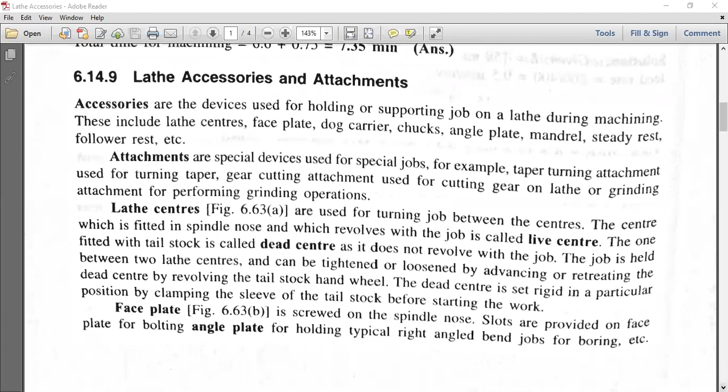The faceplate is screwed on the spindle nose at the headstock side. It is a circular disc with holes on it. It consists of a threaded section in which the nose of the lathe spindle is fixed. So why use a faceplate? Because it is usually used for workpieces that cannot be held properly by centers and chucks. If the workpiece cannot be held by the dead center, the 3-jaw chuck or the 4-jaw chuck, we use the faceplate. We will see the diagram also.

So slots are provided on the faceplate. Slots means circular holes, or slots are provided on this particular faceplate. So you have to bolt that for bolting the angle plate, if we want to bolt the angle plate for holding typical right angle bend jobs. If you want right angle bend jobs, you have to use the faceplate.

And already I told you, the faceplate is used for workpieces that cannot be held properly by the centers and chucks. So that is one of the things, for holding right angle bend jobs for boring operation. So all this is one of the aspects of this faceplate. Diagrams we'll try to see whenever they come in between. So the job itself is bolted on the faceplate.

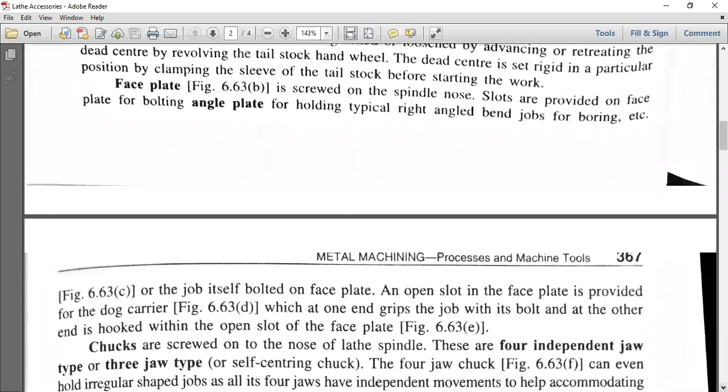You can easily bolt because we have the circular holes or discs where we have the threaded portions, and whatever job we want to machine, we fix on the faceplate, and we use that as a lathe accessory for the subsequent machining of the job.

So we have an open slot in the faceplate. The open slot we have already shown in one of the diagrams yesterday. Why is the open slot there in the faceplate? It is provided for the dog carrier. We'll see in diagram 6.63, because it grips the job with its bolt, and the other end with the open slot of the faceplate. So that is one of the important aspects of the faceplate.

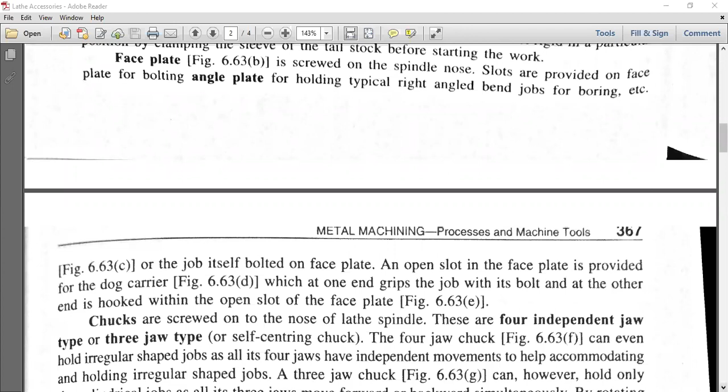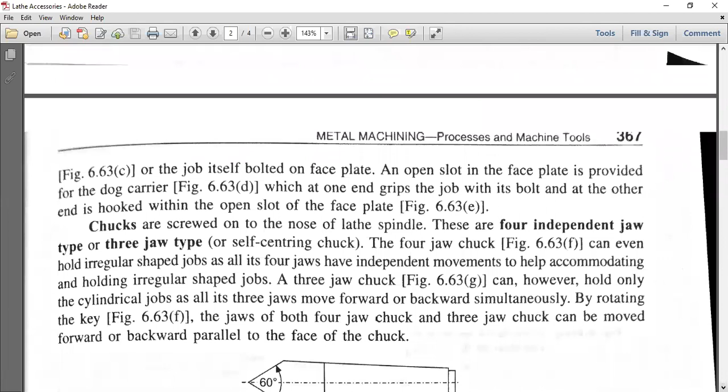So we have the chucks also. Chucks are screwed on to the nose of the lathe spindle. So we first will try to finish up the faceplate diagram. So we have an ordinary center, the different types of centers. I already told you, we have to discuss the dead center, ordinary center with an included angle of 60 degrees.

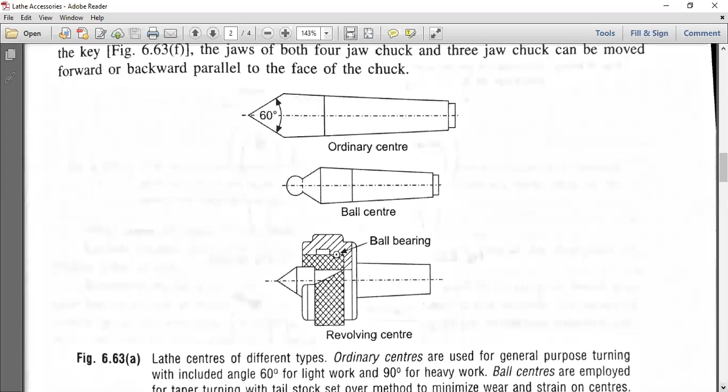And this is a ball center. And this is the revolving center. Yesterday I told you, for holding the heavier jobs or workpieces. So lathe centers are of different types. Ordinary centers are used for general purpose turning, with an included angle of 60 degrees for light work, and 90 degrees for heavy work.

Ball centers are also employed for taper turning operations, because in taper turning they mostly use ball centers in one of the methods, the tailstock setover method, because we have to minimize the wear and strain on the centers. If there is wear and strain on the centers, the taper turning cannot be carried out properly. So we have the revolving center also.

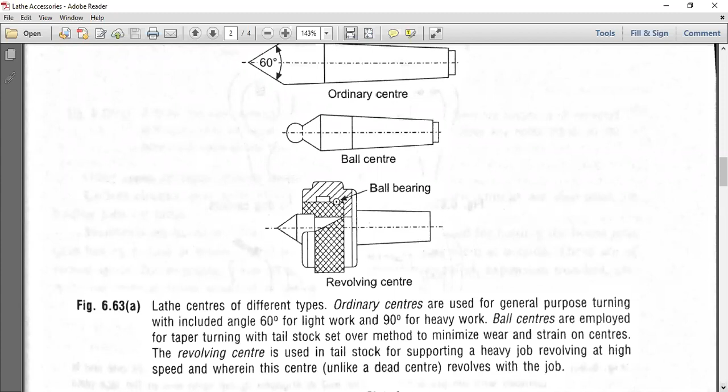The revolving center is used mostly in the tailstock for supporting a heavy job revolving at high speeds. And this particular center, as I told you, unlike the dead center, revolves with the job. The name itself we have, revolving center. Only the revolving center will revolve with the job. Other dead centers, the ordinary center or ball center, will not revolve with the job.

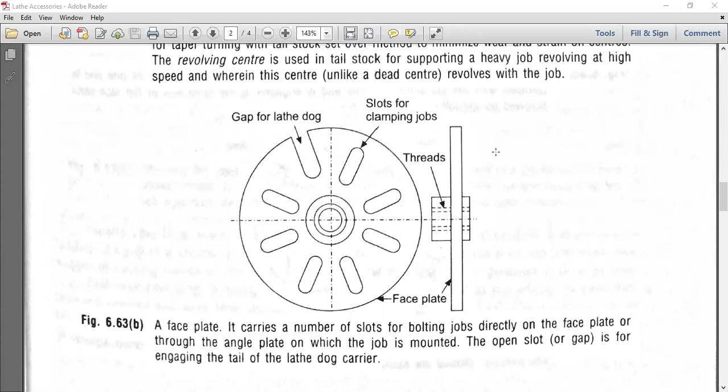So we try to see the faceplate here. The faceplate carries a number of slots. It is a circular disc with a number of holes or slots on it, and there's a gap for the lathe dog. So these are the slots for clamping the jobs. This is the threaded portion on the faceplate.

Why is the threaded portion there? Because you have to fix the job. Suppose you want to fix the job on the faceplate, because we have threaded holes, by means of bolts and nuts we can fix the job, which is circular in nature, or any other job other than circular. We can just match the holes on the faceplate.

So you see the matching, because in the tool room they make the workpieces to match the holes or slots on the faceplate. So what is the purpose of the open slot? I already told you. The open slot or gap is for engaging the tail of the lathe dog carrier.

On the lathe dog carrier, we have this one, the tail. We can easily engage that particular one. So that is the faceplate. It is easy to draw. Only you have to have a circle, slots, and the concentric circles.

How many you have to draw? You just try to see. You have to have the gap or the open slot, and these are the slots for clamping the jobs. And you have to draw the side view also, the projections, because this is fundamentals as far as engineering graphics is concerned. And these are the threads which you have on the faceplate.

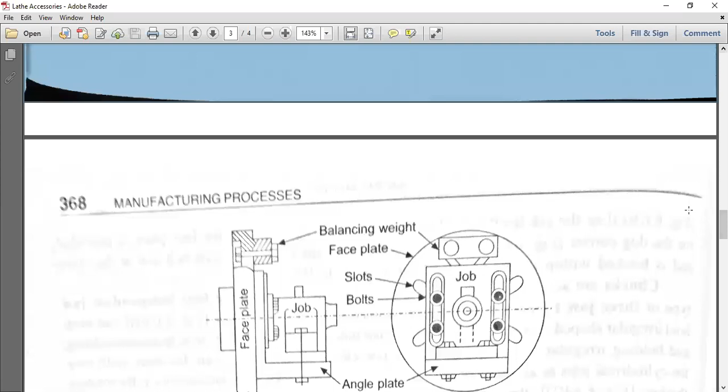So next, what we have finished. So just try to see what is the next one. This is the angle plate. So just try to go one by the other. I think we have to see if we have jumped, because sometimes pages are skipping. So what is an angle plate? Angle plate, you just try to see the diagram. Already I told you angle plate is used for supporting purpose.

So we have an angle plate. This is a face plate. This is a balancing weight. This is a face plate, and this is the angle plate. You fix the angle plate on the face plate. This is the job. The angle plate is used for supporting the job. So this diagram uses the face plate along with the job mounted on the angle plate for carrying out the boring operation.

So what is the material of the angle plate? It's a cast iron plate machined on both the faces, and it consists of holes or slots. Just try to see. These are the slots on both the faces. On both the faces, we have the holes and slots which help in holding and clamping the workpiece for the complex and irregular shapes.

And mostly this angle plate is used along with the face plate. So all these are very important aspects. The holding face of the face plate is kept in the horizontal direction. So all that you have to observe. And these are the slots which you have on the angle plate. And this is the side view of the angle plate.

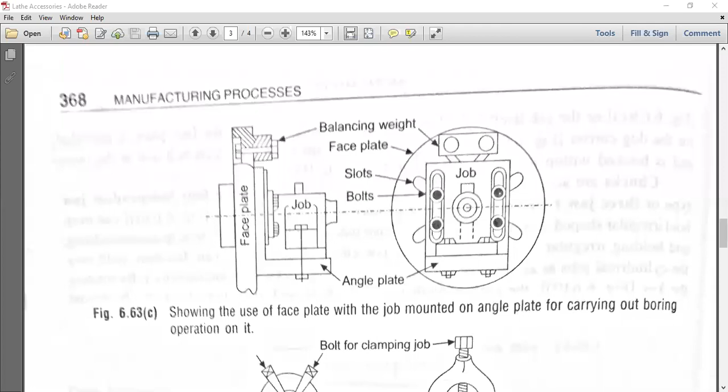So these are the bolts which are used for fastening the angle plate on the face plate. So all these are very important aspects you have to consider. The center one is the job, and this is the angle plate, which is used to support irregular or complex jobs. I already told you to be very clear about the diagrams which you have to draw, which carry 60% weightage as far as that question is concerned.

So different types of lathe dog carriers are there, and these are the lathe dog carriers. Why are we putting a gap on the faceplate? Because it has to accommodate this tail. This is the tail of the lathe dog. I am showing it with this cursor, and these are the bolts for clamping the job.

These lathe dog carriers are the attachments, the accessories which are used along with the faceplate. And on the faceplate, you have to have a gap or a slot to accommodate the tail portion of the lathe dog.

Tail portion of the lathe dog. Different types of lathe dog carriers are there. This is a simple type, with particular bolts set at an inclination and angle. In this particular lathe dog, we have only one bolt for clamping the job.

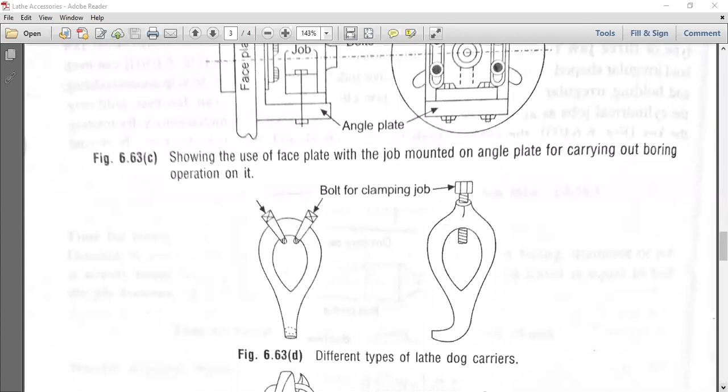It depends upon the particular job which type of lathe dog carrier you use. All these are very important, so just try to see the particular lathe dog.

All these are very important things you have to consider.

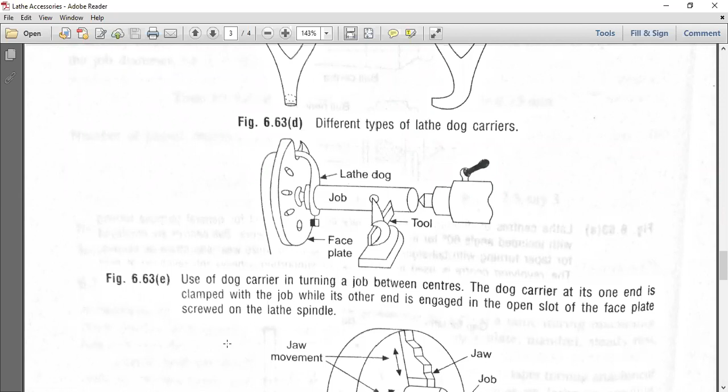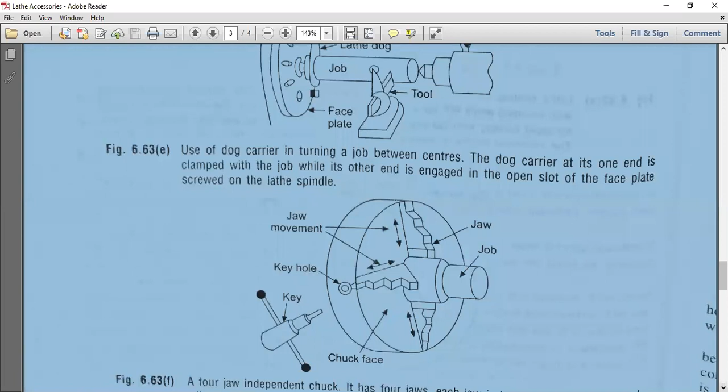Okay, so this is the particular chuck we are discussing. What is a chuck? Simply, a chuck is used for holding and rotating the workpiece. All these are very important aspects you have to consider.

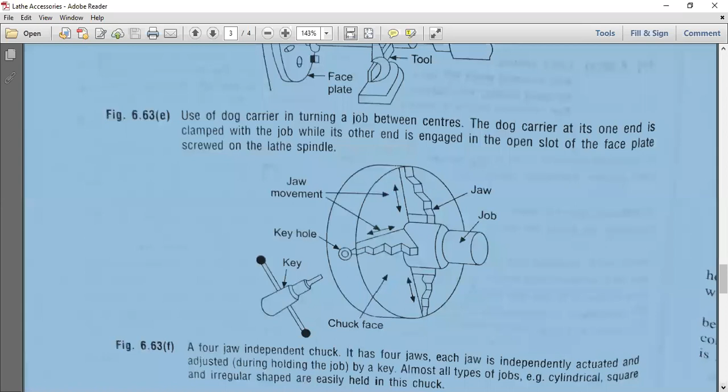So what is a chuck? A chuck is used for holding and rotating the workpiece of short length.

So this is a keyhole, this is a key, and this is the jaw movement. It will be opening and closing. If you want to clamp the jaw, you have to open the jaws, and this is the jaw. You just try to see how the jaw movement will be. The jaw will be opening in this particular direction, see the arrows in both directions. This is a very important aspect of this 4-jaw independent chuck.

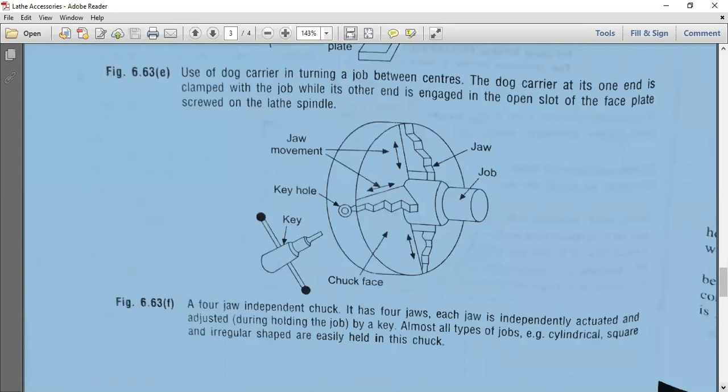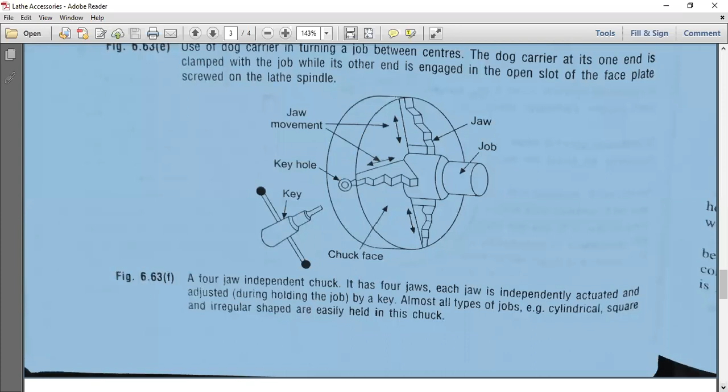So if it is an automatic jaw clamping and unclamping, after the job is finished, you try to unclamp the particular job from the chuck. So all these are very important aspects you have to consider.

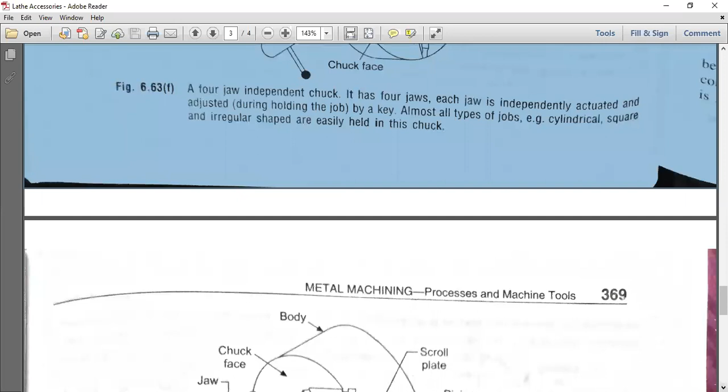Next slide we'll try to go. Everything is diagram based. You just try to see only 3 or 4 lines, or maximum up to 5 lines you have to explain, but the diagram is very important. So this is a diagram related to a 3-jaw self-centering chuck.

Self-centering, so it has 3 jaws. All of them are advanced or retracted simultaneously. Advancement and retraction simultaneously we can make by turning the key. So what is the key? By turning this key, we can make it move with the help of that particular key.

Already we have shown this in the independent chuck. Like a drill chuck key, we have a chuck key here, and we'll be using it. The key is placed in any of the three keyholes. The 3 keyholes are made on the periphery of the chuck. Periphery means on the edge of the chuck. So all these are very important aspects.

This is the body of the chuck. This is the chuck face. This is the jaw, which can be used for advancement or retraction. Retraction means whenever you want to unclamp, you try to retract backwards, and whenever you want to clamp, you advance it.

Advancement and retraction simultaneously can be done by turning this particular key, with the help of a chuck key, which is inserted into the keyhole placed on the periphery, on the edge of the chuck.

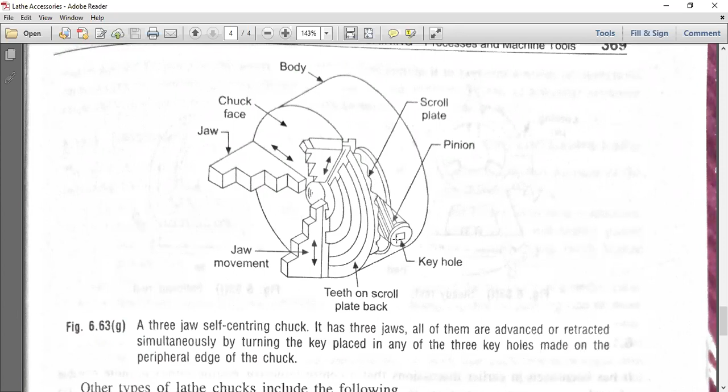So this is the pinion. The particular movement, the mechanism of the chuck, can be made with the help of the pinion, the scroll plate and pinion. Mostly in combination we can make this.

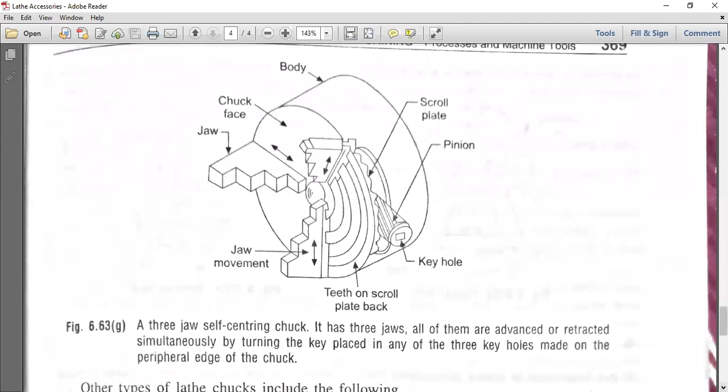So what are the other types of chucks? Other types of lathe chucks include collet chucks, magnetic chucks, hydraulic or pneumatic chucks. These are the other things.

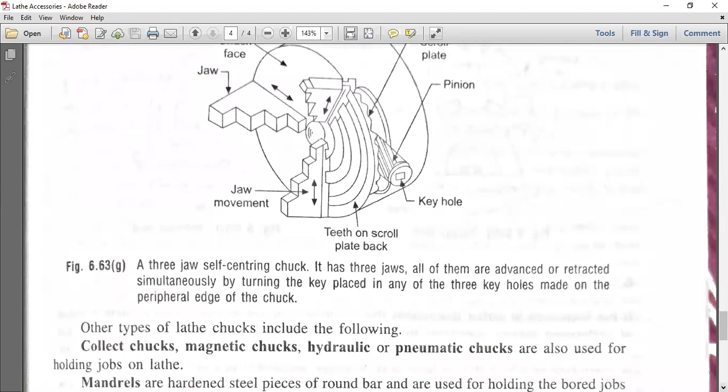Collet chucks are mostly the collets which are used in drilling for holding the drilling tool, the boring tool, or the reaming tool. And the magnetic chucks, they're operated by magnet, and the hydraulic by means of hydraulic means, and pneumatic by means of air.

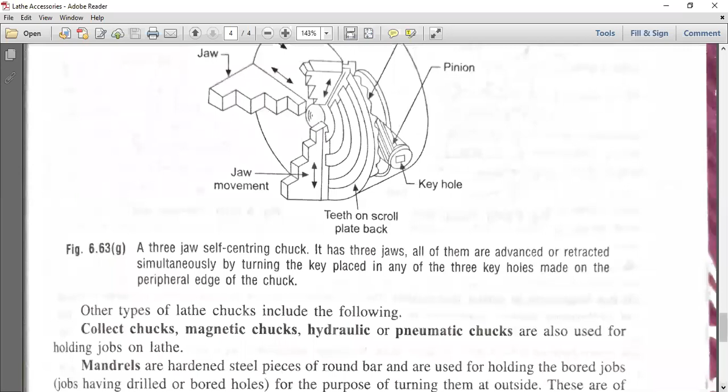Hydraulic means you have a hydraulic cylinder. In pneumatic chucks, we have a pneumatic cylinder. The air will be coming from the compressor, and the chuck is actuated. Actuation means the movement of the chuck can be made by means of a pneumatic cylinder in case of a pneumatic chuck, and by means of a hydraulic cylinder in the case of a hydraulic chuck.

So these lathe chucks are of many types, but mostly we discuss the 3-jaw self-centering chuck and the 4-jaw independent chuck or the universal chuck.

So you just try to note, this is a collet chuck. The 'c' is not there, there's a spelling mistake in the standard textbooks also. You just try to see, collet, it's known as collet.

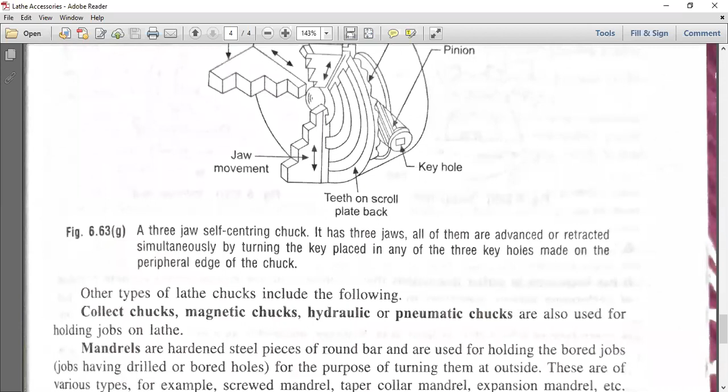So we have the mandrel. Already I told you the mandrel is used for the alignment test, because directly you cannot check the trueness of the particular spindle you have inserted in the spindle housing at the headstock center. So you have to use a mandrel.

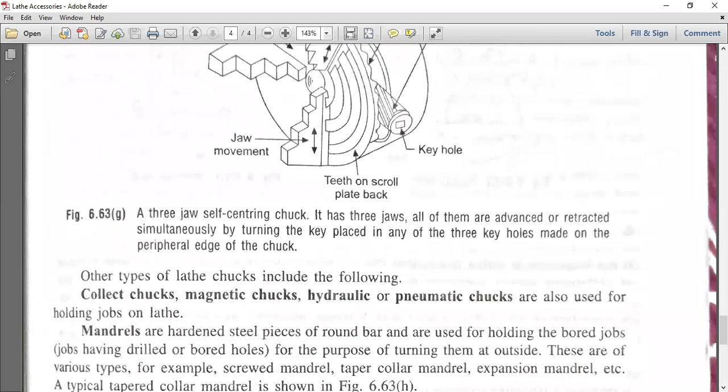Mandrels are nothing but hardened steel pieces of round bar, used for holding the bored jobs. What are bored jobs? These are jobs which have drilled or bored holes, for the purpose of turning them on the outside, so you can use them to turn externally. All these are very important aspects.

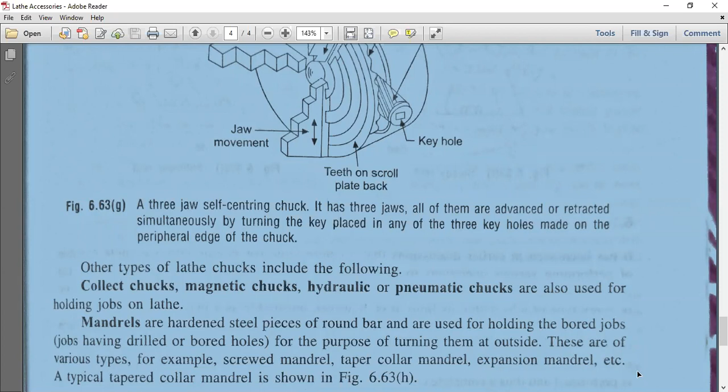These are the various types shown in the particular diagram. You can see the various types of mandrels: one is the screw type of mandrel, the other is the taper collar type of mandrel, and the third is the expansion mandrel. In one of the diagrams, he has shown the typical tapered collar type mandrel. You can see in the next figure.

This is the typical tapered collar mandrel. A mandrel is not only for holding particular workpieces of irregular shape, but also, as I told you, for hollow workpieces. It is used for holding hollow workpieces between centers that are previously bored or drilled. These are very important and are used for checking the alignment in acceptance tests on a lathe machine, milling machine, or radial drilling machine.

They are fixed at the headstock center. They are made of EN steel - different types like EN36, EN8, or EN24 - and are heat treated. They should not be used in the soft condition, and are made of a particular diameter of 20 or 25 mm. These are very important for alignment tests because if you want to check the trueness or true running of the spindle, you have to use this mandrel.

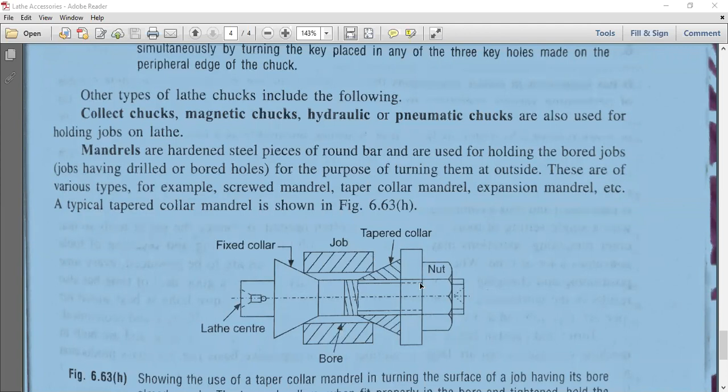You have to fix it at the headstock side or live center side. So this is a tapered lathe center, this is a fixed collar, and the mandrel will be fitted into this previously drilled bore - this is the job. This is a tapered collar, and this is a nut. You have to fix the mandrel at the headstock side or live center side, the spindle side of the lathe machine, at the left hand side.

This figure shows the use of a tapered collar mandrel, because you have to turn the surface of a job - this is a bored hole. This is the mandrel you are using, the middle portion is the mandrel, and this is the lathe center.

We have two types of collars - one is the fixed collar and the other is the tapered collar. That's why it's known as a tapered collar mandrel. It is used for turning the face or surface of a job. These are the surfaces of a job.

When you fit the tapered collar properly in the bore and tighten it, it helps hold the job rigidly with the mandrel. If the tapered collars are not there, we cannot hold the job rigidly, because no play or slackness should be there. If there is slackness in the tapered collar design, the mandrel will not be useful. So you have to fit the mandrel properly in the bore and tighten it, and then it can be revolved between the lathe centers for machining the sides or surface of the job - see the hatched portion of this workpiece.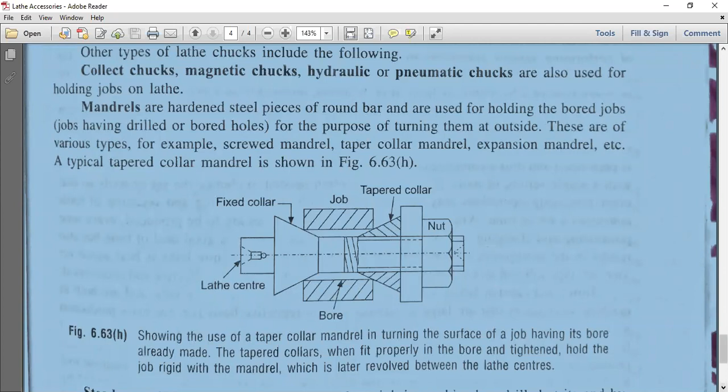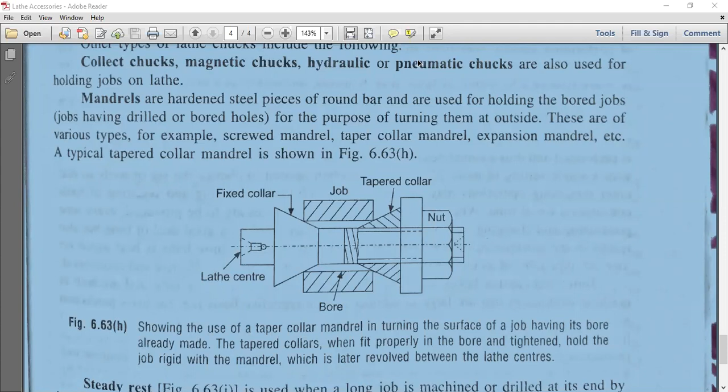So, steady rest - what is a steady rest? There are two types, as I already told you: one is the steady rest, the other is the follower rest. You have to see the functions of both. The diagrams are there - so what is the function of a steady rest?

It is used when a long job is machined or drilled at its end, for holding the job in a chuck. Why do we use a steady rest? Because it avoids deflection of the job. Whether it is an overhanging beam, a cantilever beam, or a simply supported beam, there is deflection for each - you already studied this in strength of materials.

Additionally, we have deflection under the action of cutting forces on the tool. You have to calculate that deflection in the acceptance test and design a steady rest when using a long job. Due to the overhanging nature of a long job, there may be additional deflection, and cylindricity or roundness cannot be achieved. Roundness is one of the geometric features, just like parallelism, perpendicularity, or squareness of the job. So the steady rest is fixed in one position on the lathe.

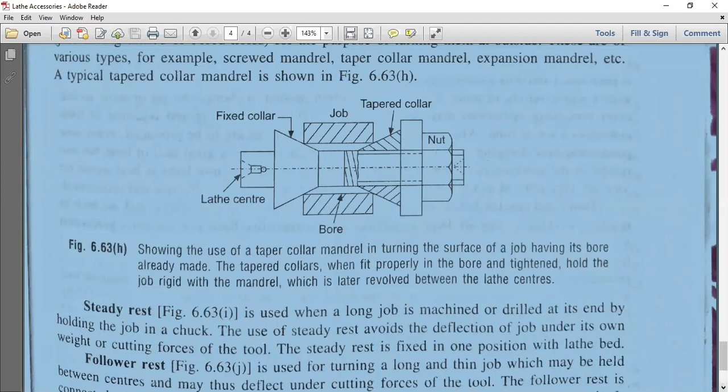Just try to see the diagram; this is the steady rest. It's fixed in one position on the lathe. So the follower rest, what is its function? It is used for turning a long and thin job, slender. For long and thick jobs, you use the steady rest. For long and thin jobs, the follower rest.

The job may be fixed between the centers, and because we have a deflection under the action of cutting forces when using lengthier jobs, you use the steady rest and the follower rest. The follower rest is connected with the carriage. You just try to see.

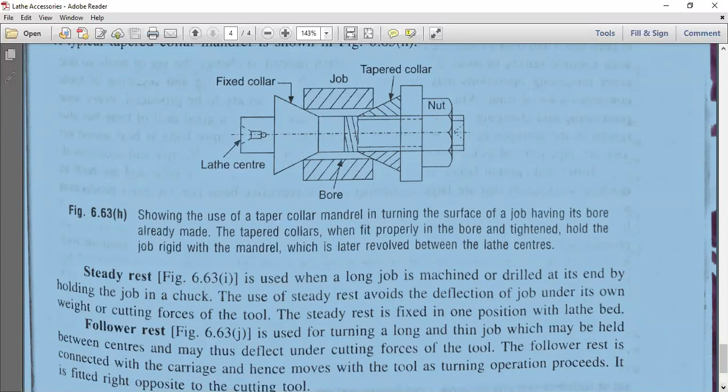So it moves along with the tool as the turning operation proceeds, and it is used for long and thin jobs, slender. It is fitted opposite to the cutting tool, on the carriage. You just try to see. The position is also very important.

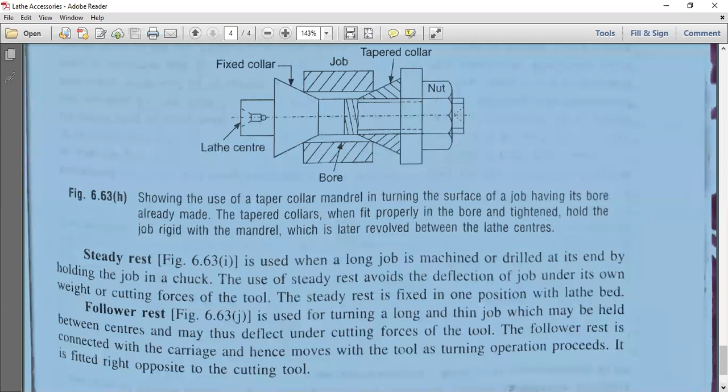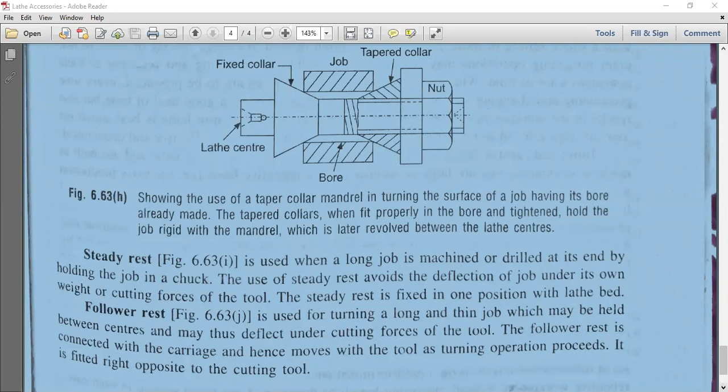The follower rest is connected with the carriage. That is one of the differences between the steady rest and follower rest. Steady rest for long and thick, and the follower rest for long and thin. All these are very important things you have to keep in mind.

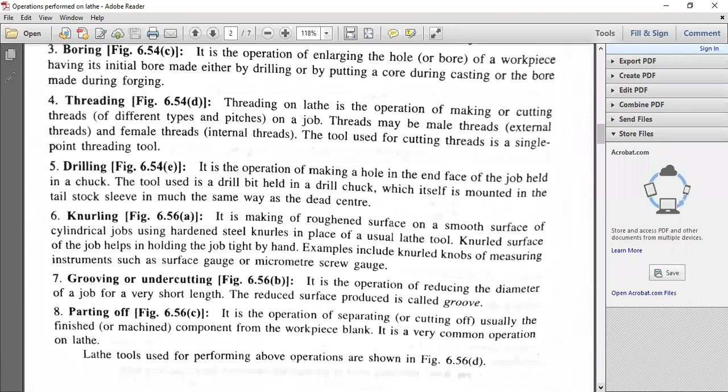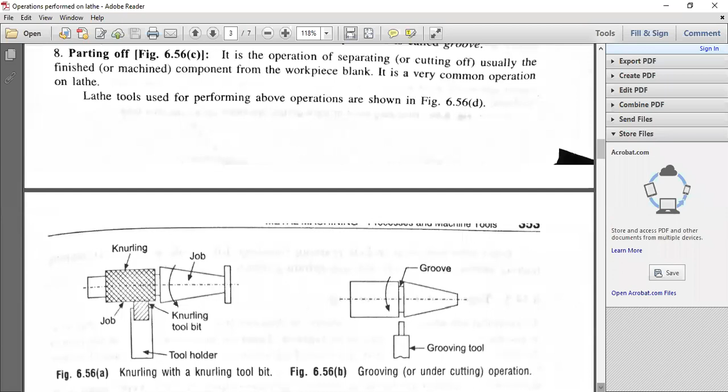So yesterday I told about using all the tools in a single job also. In one of the diagrams I discussed this particular figure, which I am scrolling up. All this we discussed yesterday. 6.56D is very important. Other lathe operations were already discussed. Now we will go for the taper and taper turning.

A tapered job is nothing but one that decreases gradually in diameter. Already we have discussed the capital D, big end diameter, for a conical job. For a conical shape, said to be tapered, we have capital D on one side, small d on the other side, and L. What is L? L is the tapered portion. What is the taper angle? The taper angle is the included angle between the tapering sides of a job.

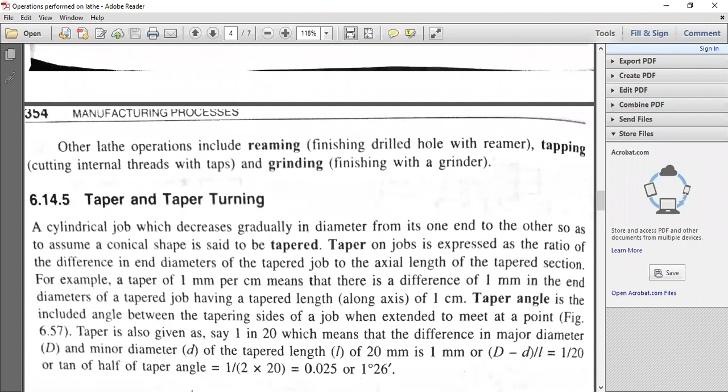Yesterday we discussed how to find the tan of half the taper angle. So 1/2 into 20; the 20 is because the taper is given in the data as 1 in 20. These theoretical calculations are very much necessary when you want to find the actual angle using a sine bar in the metrology lab. You find the theoretical angle and the slip gauge height, because the principle of the sine bar is sine theta equals h by L. So you have to find the height h of the slip gauge.

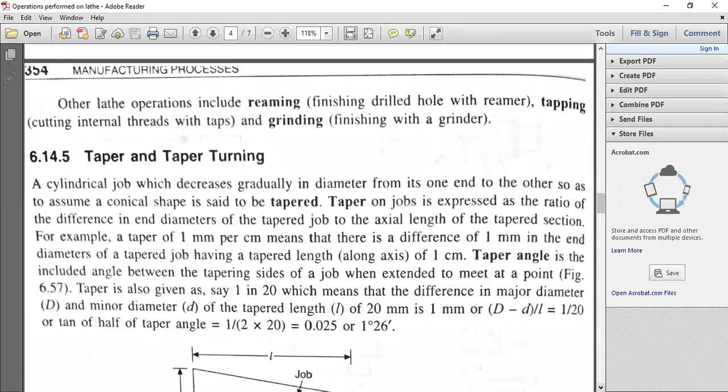Theta you find by the simple calculation tan alpha equals (D minus d) by 2L, where L is the length of the tapered portion of the job. Suppose tan alpha is 0.025. From the calculation, the taper angle is 1 degree 26 minutes. Just try to see this diagram; you can understand better.

So in this diagram, this is the taper side, this is the big end diameter, this is the small end diameter, this is the length of the tapered portion, and this is the total included angle or taper angle, 2 alpha. But while calculating, you take only one side of the taper; you cannot go for two sides simultaneously. That's why you are taking only alpha there. So tan alpha is equal to (D minus d) by 2L.

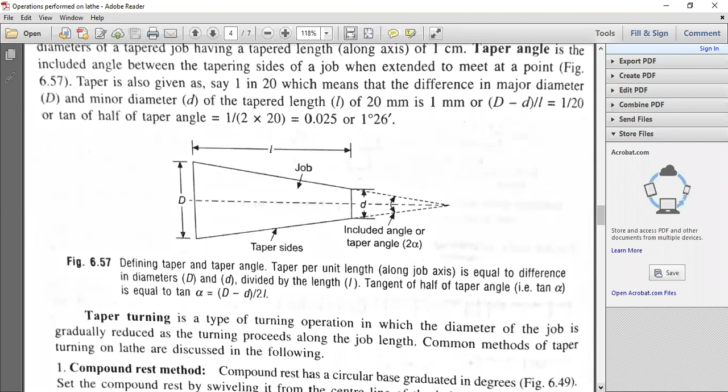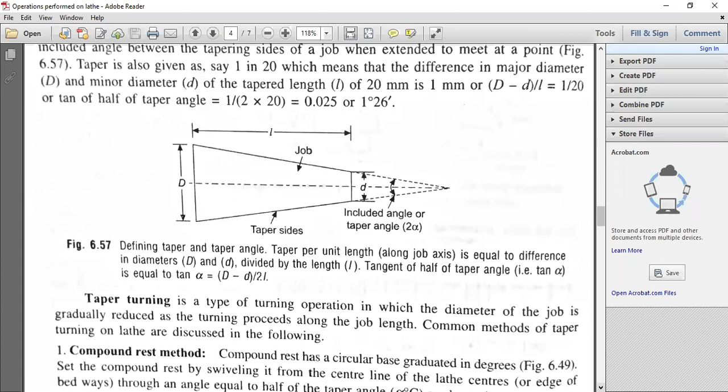So taper turning is a type of turning operation, just like simple turning or step turning, in which the diameter of the job is gradually reduced as the turning proceeds along the job length. You can have the job or workpiece go from a cylindrical shape to a conical shape. And the common methods of taper turning, just try to see.

First one is the compound rest method. The compound rest method, already I told you. In the compound rest, just try to see the diagram later. It has a circular base graduated in degrees. Whatever degree you want for the job, you have to swivel it from the center line of the lathe centers. This is the center line of the lathe centers. So that is very important.

And in the taper turning methods, you have to discuss the compound rest method, the tailstock setover method, and the taper attachment method. These are very important. They are asked every time in any one of the sets, because in JNTU we have four sets. So you have to cover the breadth of the syllabus yourself. You have to learn as a mechanical engineer.

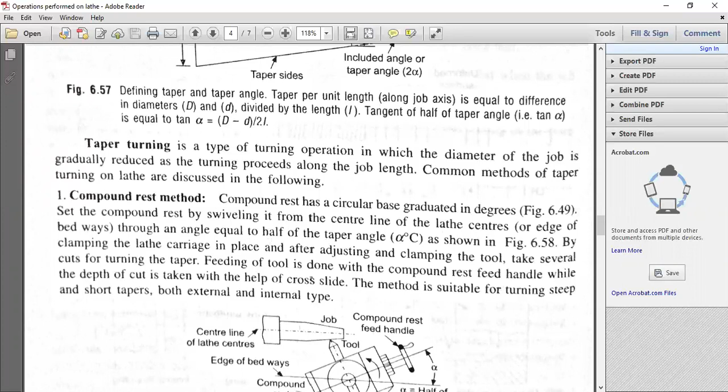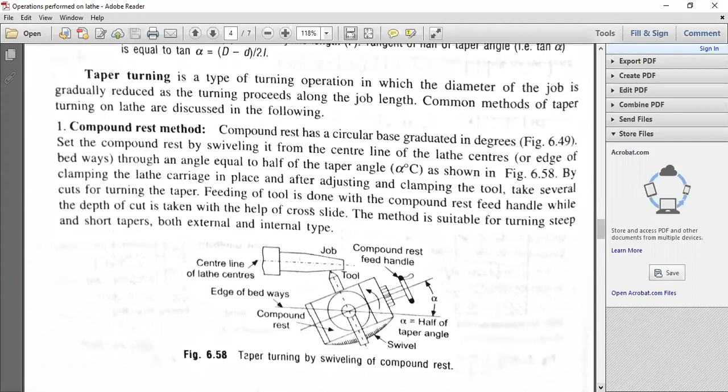So you have to swivel it from the center line of the lathe centers through an angle equal to half of the taper angle. Already I told you. You clamp the lathe carriage in place, and after adjusting and clamping the tool, you have to take several cuts for turning the taper; you cannot obtain the taper in a single pass or single cut. Feeding of the tool is done with the compound rest feed handle.

So this is the compound rest. This is the swivel base of the compound rest, with the graduation in degrees. This is the edge of the bed. So you have to swivel the tool at an angle with the center line of the lathe centers. This is the job, and this is the compound rest handle. You use the compound rest handle for feeding the tool.

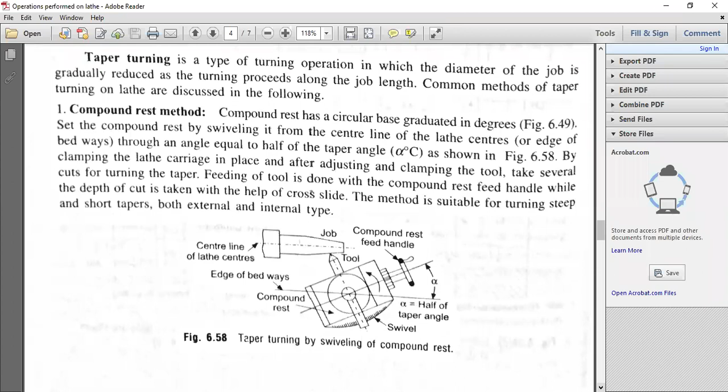The tool is fed manually, while the depth of cut is taken with the help of the cross slide. I have already told you the function of the cross slide in the second class. The cross slide gives transverse movement perpendicular to the spindle axis. That is a very important fundamental. And the longitudinal axis of the spindle: the job axis and spindle axis should coincide for effective machining or effective turning. So that is very important.

If they are not coinciding, there will be an offset in the job. Suppose you want an offset, the machine operator can set the job for it. But if the job axis and spindle axis are not coinciding unintentionally, there will be a problem in machining, and instead of zero offset, some offset will be induced in the job. So you have to reject that job, unless the offset is there in the drawing or design.

So what is tool offset? You take half of the tool diameter or cutter diameter. Suppose the cutter diameter is 1 mm, you take the offset as 0.5 mm. Like that, you go for the calculation. The tool offset and tool compensation are to be set not only in an ordinary lathe, but in a CNC lathe also. You have to set the offset adjustments in the three axes: the x-axis, the y-axis, and the z-axis.

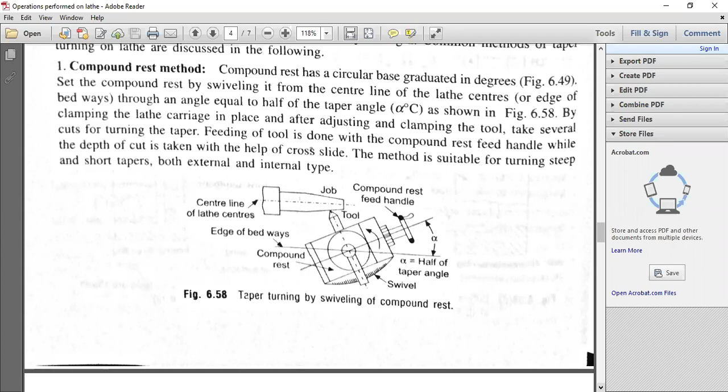In the 3-axis or 5-axis or 6-axis machining centers or the turning centers, for every axis there will be a servo motor to control the movement of the tool in that particular axis, x-axis or y-axis or z-axis. We'll be discussing in CAM, computer-aided manufacturing, the control systems, open loop and closed loop control systems.

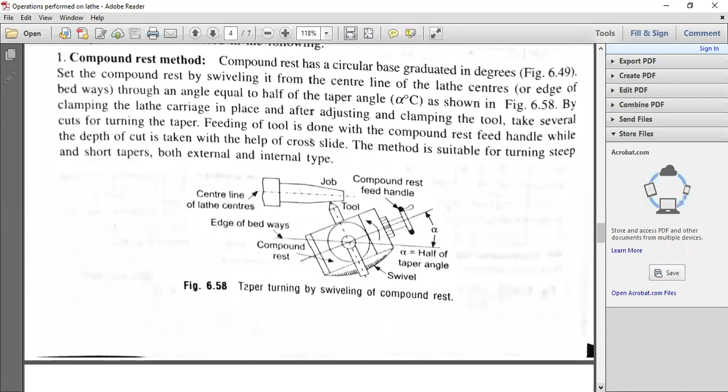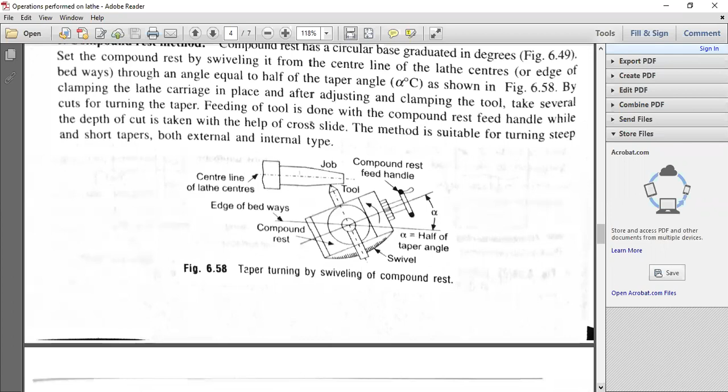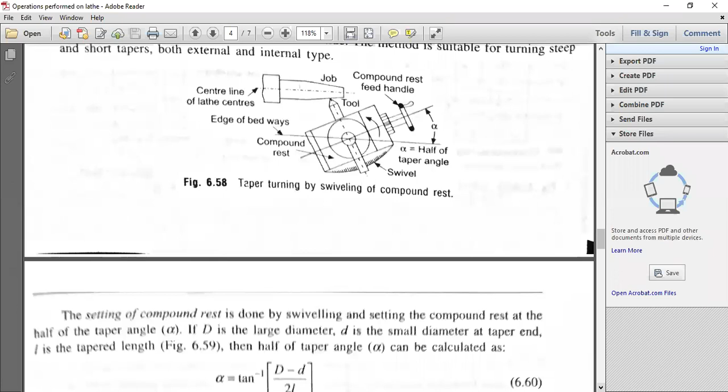So that is very important, because nowadays we are going for computer-aided manufacturing or digital manufacturing to increase the productivity. Already I told you, you can increase the productivity by 800 times. That's why the initial investment by the management is high, but later the fruits of that particular investment can be known in a particular period of time, after 1 year or 2 years, because the profits will immediately be felt by the management or the group of persons who are investing in the company.

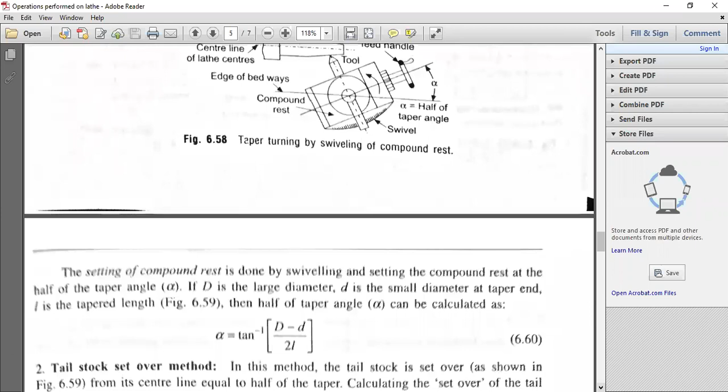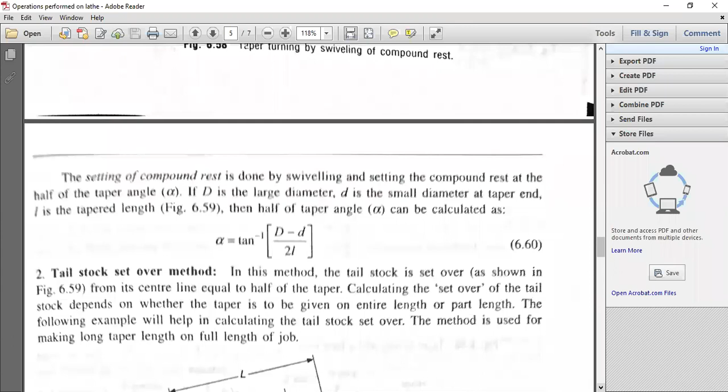So tan alpha is D minus d by 2l. So this is the compound rest method. The tailstock set over method: the tailstock is set over. You have to set over as shown in the figure from the center line equal to half of the taper. So the set over of the tailstock depends on whether you have to give the taper for the entire length of the job or for a part length of the job.

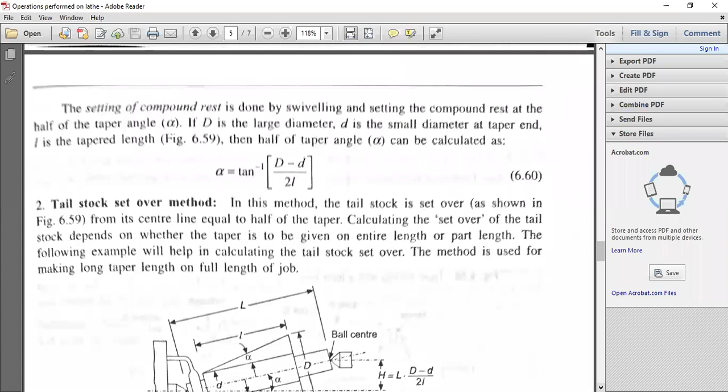So this diagram will help in knowing the particular example. This is small l, and this is the length of the job. Capital L is the length of the job, and small l is the tapered portion of the job which you want to obtain. And here you have to calculate h, which is D minus d by 2l, times L. This is the ball center.

You have to use the ball center here for this tailstock set over method. Already I told you different types of centers are there, and you have to use the revolving center if the job is heavier and lengthier. And why revolving center? Unlike the other dead centers, it will be revolving along with the workpiece.

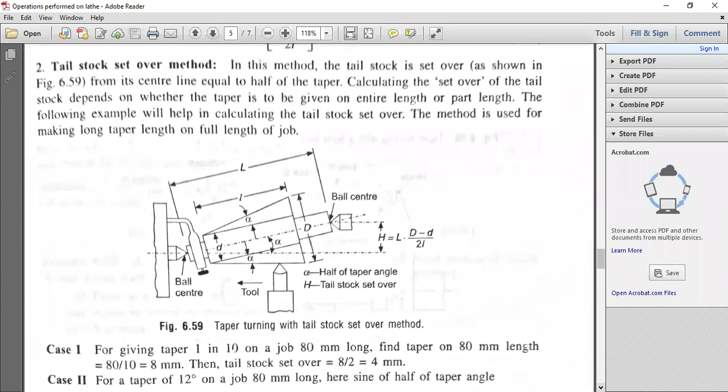So half alpha is half of the taper angle. Capital H is known as the tailstock set over, and this is the tool that is used for the taper turning. So you have to draw this figure for taper turning with the tailstock set over method. To understand the tailstock set over method, for the first case, giving a taper of 1 in 10 on a job 80 mm long, 80 mm is capital L, and you have to find the taper for 80 mm length.

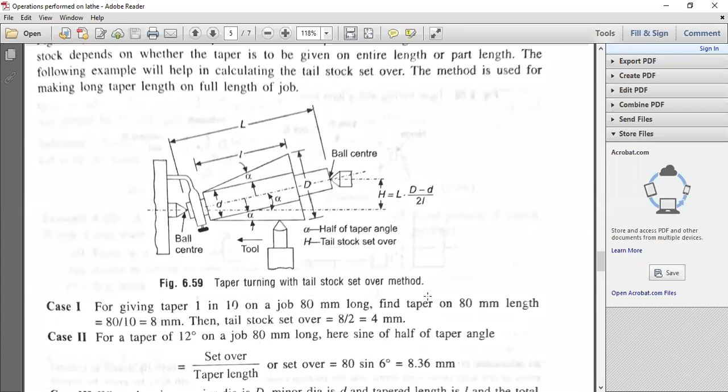So what is that? 80 by 10. 1 in 10 means, the job is 80 mm, so 80 by 10 is 8 mm. So what is the tailstock set over? You have to take half of that value, 8 mm. So the tailstock set over is H. So you have to see that for 8 mm, you go for the taper on the job of length L. So that is very important.

Case 2: for a taper angle of 12 degrees on a job 80 mm long. Already I told you, sin theta is equal to H by L, where H is the set over. So H is 80 into sin theta. He has given the taper angle as 12 degrees, but I have to take half of the taper angle in the calculation. Instead of 2 alpha, I take 6 degrees: 80 into sin 6 degrees. It is 8.36 mm.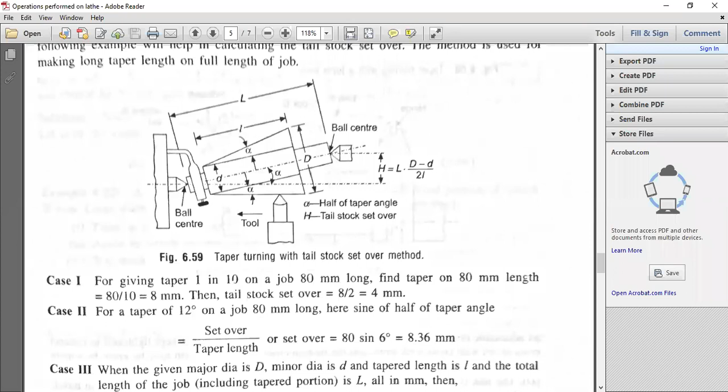This is the theoretical calculation you have to do while calculating the taper angle of a specimen, a shaft or a spindle in the metrology lab. You have to conduct the experiment using a sine bar, because in the principle of the sine bar, sin theta is equal to H by L, where L is the distance between the sine centers.

Those who have a diploma have just studied metrology, so they know, but other people cannot know. We'll see it in the second semester, the metrology subject, which you have to take. But in the theoretical calculation, what I told you, tan alpha is equal to D minus d by 2L. That L is nothing but the tapered portion of the job, the tapered portion of the spindle or shaft, which is already turned.

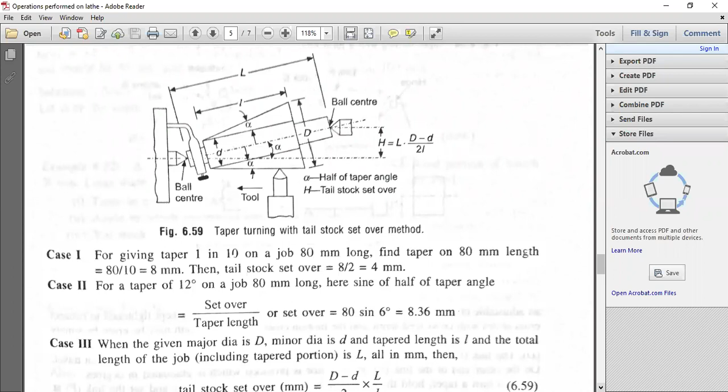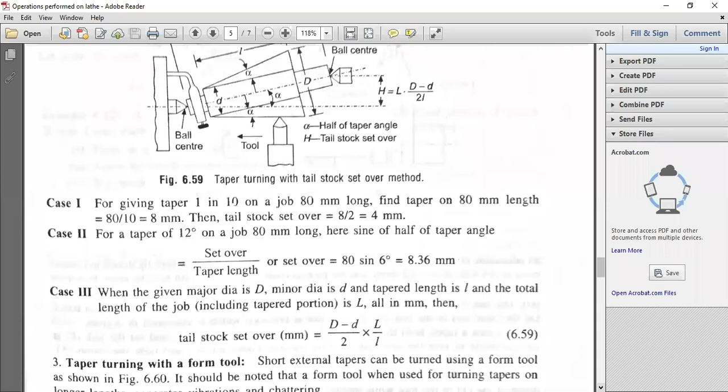That is taper turning by one of these methods, the compound rest or the tailstock set over method. So in case 3, the given major diameter is D, the minor diameter is small d, and the tapered length is L. So you have to calculate like this: for the tailstock set over H, you calculate D minus d by 2, that is 25 minus 15 by 2, whatever value you give, into L. Suppose you take L as 80, you can get the tailstock set over.

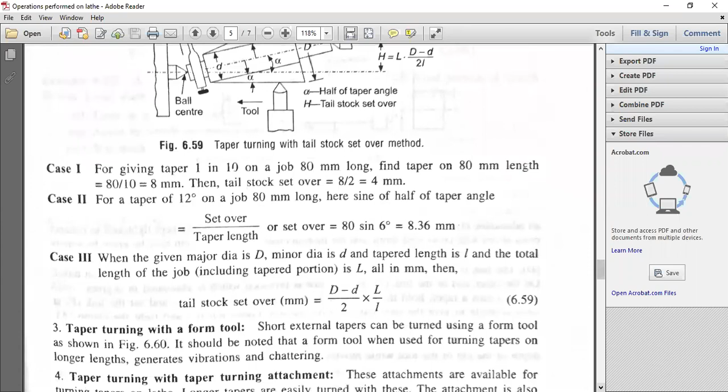So there are these 3 cases, but the third case will mostly be followed for the tailstock set over in the machine shop. And the second case we will mostly use for the experimentation part, where you have to find out the H of this gauge. So all these are very important things, and you have to concentrate on the compound rest method and the tailstock set over method, according to the particular marks.

Taper turning with the form tool: for short taper sections you have to use form tools, because, as I already told you, form tools are designed according to the shape of the job or workpiece you want, according to the particular design. And it should be noted that when the form tool is used for turning tapers on longer lengths, vibrations will be there, and the machining on the workpiece will not be done properly. There will be tool marks and tear marks.

As in the surface finish or surface texture chapter in metrology we'll be discussing, instead of a smooth finish you will get a rough finish, you cannot get the surface finish value according to the design, and there will be chatter marks. So short taper sections can be turned using a form tool. So the form tool is very much necessary, and you have to design it and make it in the tool room or purchase it from a tool room manufacturer.

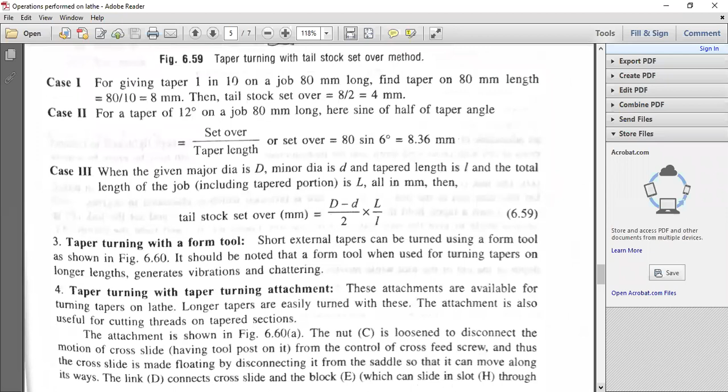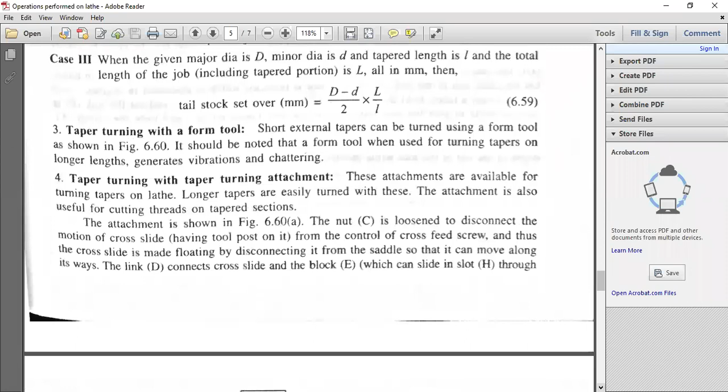Taper turning with the taper turning attachment is also a very important thing. Try to see this yourself, or we'll discuss it whenever we have time, because I started with the lathe accessories and completed mostly the 3 types of taper turning. To summarize: the compound rest method, the tailstock set over method, and taper turning with the form tool. Because we only have 1 or 2 minutes, we'll wind up now. So what have we discussed?

We have discussed the lathe accessories. These are the centers we have discussed, the live center and dead center. The chucks: the 3-jaw self-centering chuck, and the independent 4-jaw chuck, or the universal chuck. You have discussed the face plate. You have discussed the mandrel. What is the mandrel? It is used for holding hollow workpieces between the centers.

And you have seen the angle plate also, which is used for holding and clamping the workpiece. All these are very important aspects of the lathe accessories. We have already discussed the attachments also. In the next class, we'll discuss the tool holding devices, or whatever is next in the sequence as per the syllabus, and you just try to prepare daily and practice that.